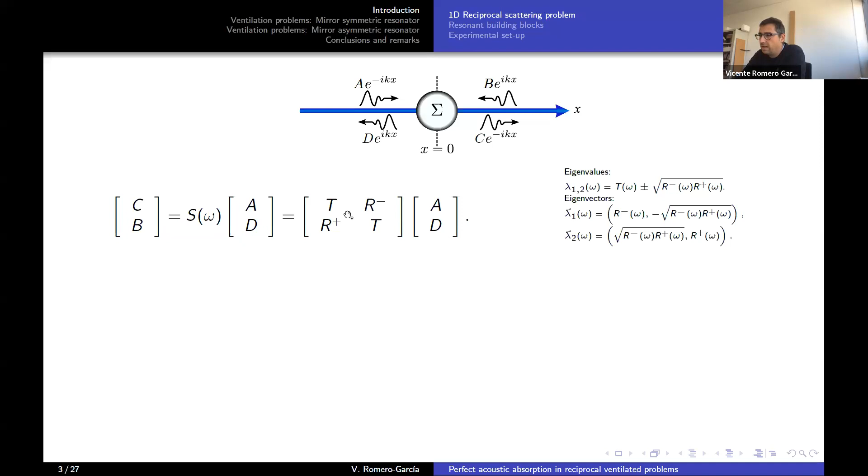So here you can study the eigenvalues and eigenvectors of the system. You can notice that if an eigenvalue of the scattering matrix is 0, this corresponds to the case in which the incident waves can be completely absorbed, because C and B are equal to 0. This happens at a frequency at which the transmission equals this value.

When we don't have losses, this appears for a frequency that is complex, so it's not realistic. But when we have losses, this can happen for a frequency that is real, and then we can have the situation of perfect absorption.

In a simple case in which you don't have transmission, so if you are not in a ventilated problem, the scattering matrix collapses to a scalar value, which is the reflection coefficient, and perfect absorption is just the impedance match problem of the system. What you want is that the reflection coefficient will be 0 at some particular frequency.

I will not talk about that because I'm interested in the ventilated problems. And in the ventilated problems, in fact, you have two different kinds of problems.

The first one is the asymmetric resonator. Notice that I can have the same transmission coefficient because I'm in the reciprocal problem, but I can have different reflection coefficients in the case of lossy systems, in which the reflection coefficient is different from both sides. This means that the system behaves in a way which is asymmetric or non-mirror symmetric with respect to the middle plane.

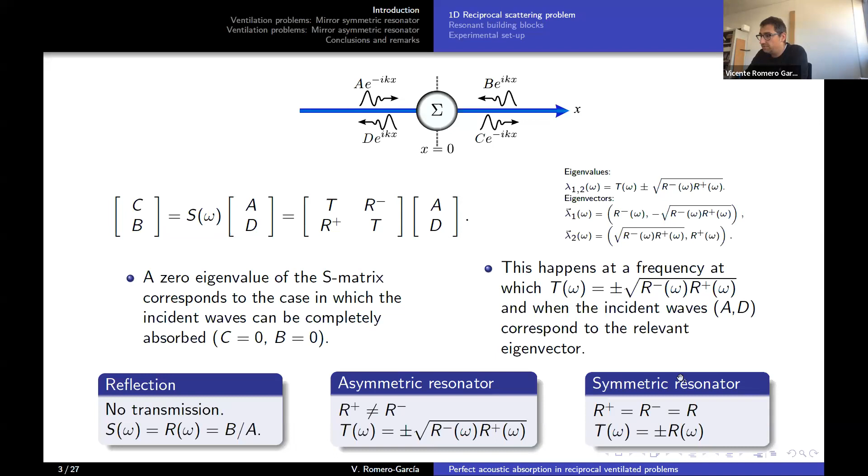Let me start by discussing this system with symmetric resonator. This is what I call a reciprocal symmetric system. So here is the system that I want to study.

This is a panel in which you have slits, and these slits you load, in that case, with Helmholtz resonators. A wave arrives from the left, and then you have the reflection and the transmission coefficient. In that system, I will consider the losses by using the Stinson model, which is effective, complex, and frequency-dependent parameters. I will also consider the correction length accounted for the Helmholtz resonator.

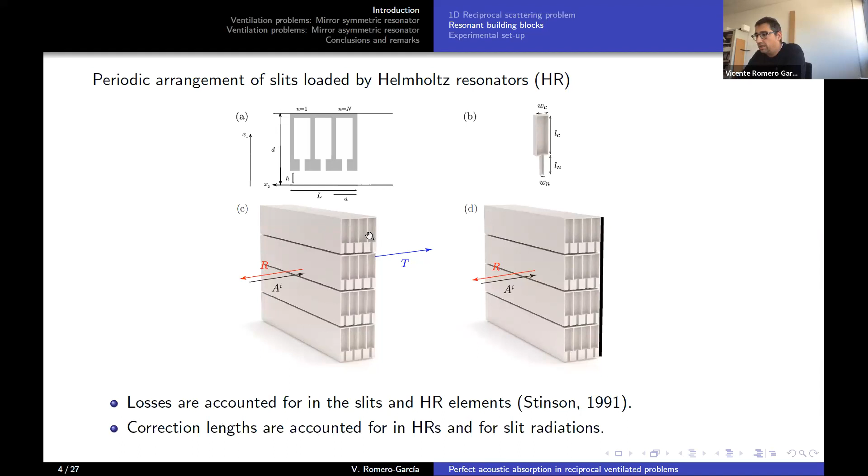So in the experiments that I will show through this presentation, I will use this setup in which I put the resonator in this position here, flush mounted or at the end in the structure. Basically, I will put this and I will have slits here. And I have a robot that can measure the acoustic field in this part of the system in order to obtain the A and B amplitudes.

And in the other part of the tube, I have 4 positions which allow me to obtain C and D. I will use an anechoic termination.

Here you have the characterization of the anechoic termination, and you can see that in fact it's really working in the range of frequencies in which I want to study the perfect absorption.

I will use also what we call the Argand diagram to visualize the perfect absorption from the experimental data. This is just the representation of the eigenvalues of the scattering matrix in terms of real and imaginary part of them in terms of frequency.

If one of the points is close or on the origin of coordinates, this configuration corresponds to the perfect absorption configuration, just to give you this information.

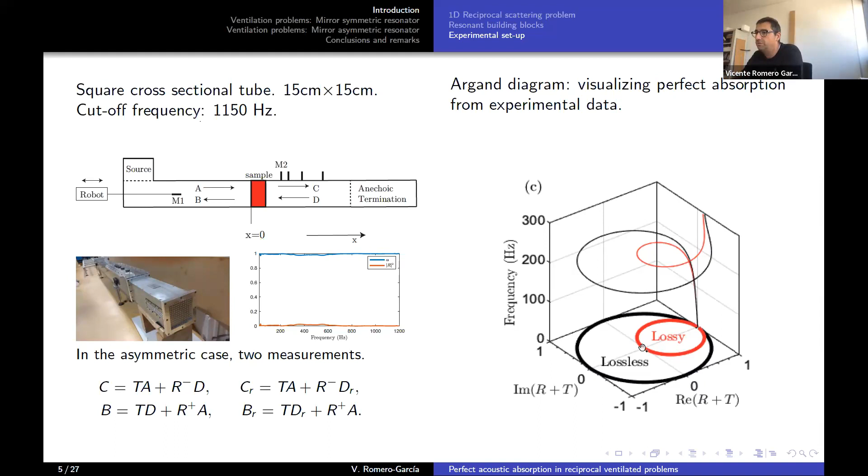So let me start by the mirror symmetric resonator. This case is represented by this plot here. You can see here a full transmission problem. And here you have a wave that is radiating from the left to the right to the system.

The system is here represented in black. Then you have the reflection coefficient and the transmission coefficient. And in that case, as the system is completely symmetric, the reflection coefficient is the same from both sides.

And the transmission coefficient in the diagonal is the same because we are in reciprocal systems. Okay, so let me just discuss two different configurations in which I introduced a Neumann boundary condition at the middle plane of my system.

If I introduce this Neumann boundary condition, this is like a mirror for acoustic waves. Basically what you have from this mirror is the image from the other side of the reflection coefficient. When we put a Neumann boundary condition in the middle plane of the structure, it's just the addition of the reflection and transmission coefficient of my original problem.

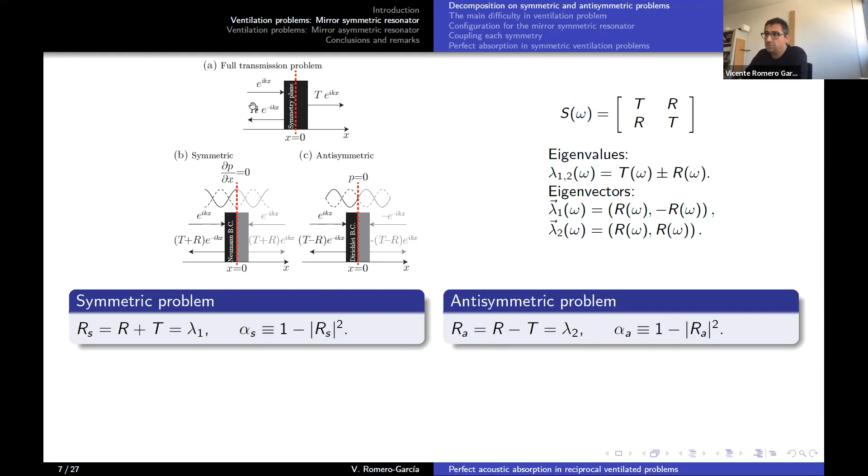So look, if I want to study the reflection and transmission coefficient of my original problem, I can decompose this problem in terms of a symmetric problem and an antisymmetric problem, in such a way that the reflection coefficient is the reflection of the symmetric plus the reflection of the antisymmetric, divided by 2. The transmission is given similarly, and the absorption is just given by the absorption of the symmetric plus the absorption of the antisymmetric, divided by 2.

So if we want to obtain a perfect absorption, alpha equal to 1, at a given frequency in this kind of problem with symmetry, then we need to simultaneously obtain that the reflection of the symmetric problem should be 0, and the reflection of the antisymmetric problem should be 0. Then, if we have that, the absorption of my original problem is equal to 1.

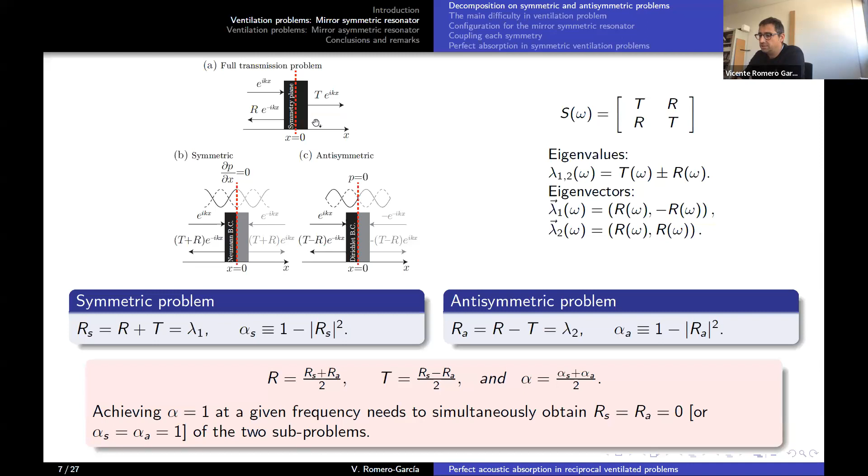So let me discuss this situation in a very simple case. This is the case in which you have a slit here of length L. We have the amplitude, the pressure, the incident pressure here, the reflection and transmission. This is a very simple problem, it's just a Fabry-Perot resonator, basically.

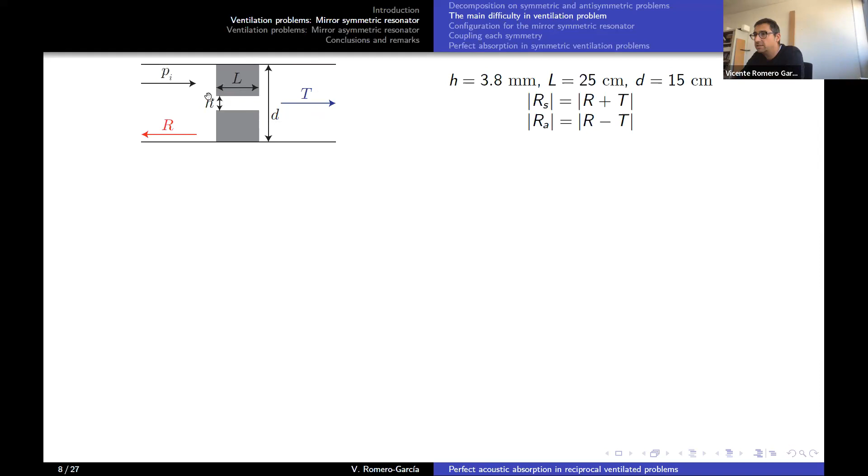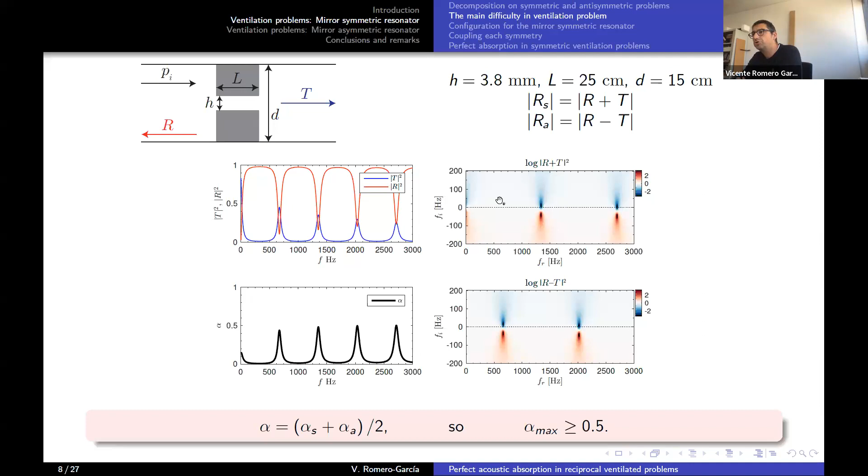We can have more if we have another kind of resonator that couples the antisymmetric and symmetric problem, in the example that I gave you. So to solve this problem, what we need is to introduce other kinds of resonators that present symmetric and antisymmetric resonances at the same frequency. This is what we call degenerate resonators, because they have two resonances at the same frequency.

In that case, what we use is basically this block here, in which we have two slits. In one of the slits, we load a Helmholtz resonator, and in the other one, we load two Helmholtz resonators. In the case where we load a single Helmholtz resonator, we will have a symmetric mode. And in the case where we load two resonators, we will have a symmetric mode and an antisymmetric mode.

So in that problem, we will consider the losses by the Stinson model, as I told you previously. The correction length of the Helmholtz resonators is also taken into account. But in that case, we consider several modes, the multimodal propagation in the waveguide, in order to account for the possible coupling between the slits.

Which we will see is quite critical in that system. So in order to obtain perfect absorption in that kind of system, what we need is first to work with the antisymmetric resonator. So let's consider the same configuration, but in which we impose a Dirichlet condition at the middle of the system. In that case, what we have is a change of phase in the image of the original reflection problem.

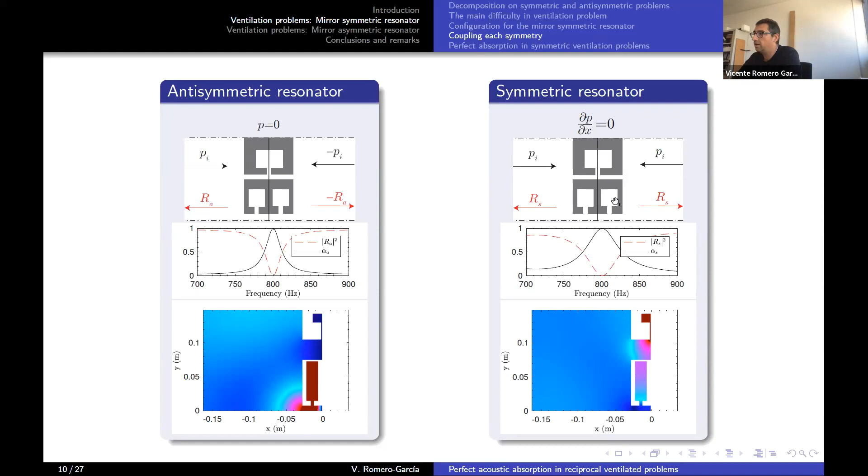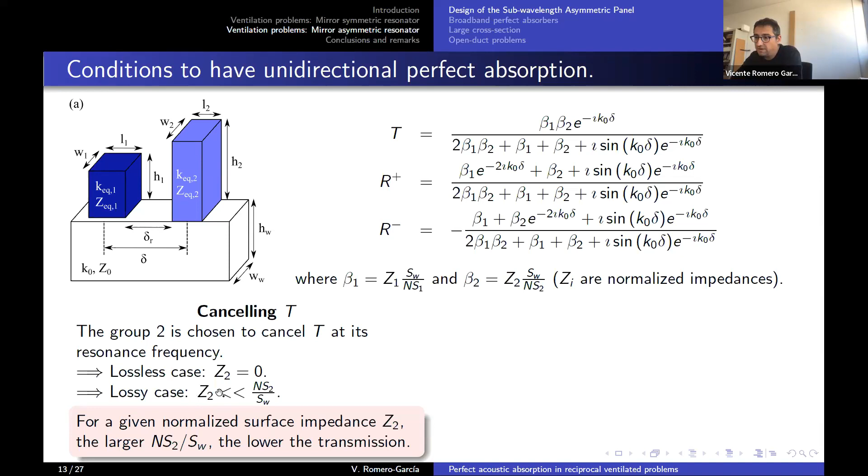Even in that case, the impedance could be much bigger. So once we cancel T by using this resonator, we need to cancel one of the two, R plus or R minus.

So this is the price that we have to pay in order to obtain perfect absorption with asymmetric structures: we only can obtain perfect absorption from one side. This is what I called unidirectional perfect absorption.

So to cancel R plus, if we impose Z2 equal to 0 or close to 0 with a very small value, the condition that we obtain is an equation that we can develop in Taylor.

And if you develop that in Taylor, we obtain a minimal absorbent length that depends on the cross-section of the waveguide, basically. So the cross-section of the waveguide is quite important.

And in particular, if you are close to the Fabry-Perot resonance of the system, at these frequencies you cannot obtain perfect absorption because the system is purely reflective. So here you have to play with the cross-section.

So let me discuss that kind of thing. First of all, let me start with a small cross-section, which is the system here.

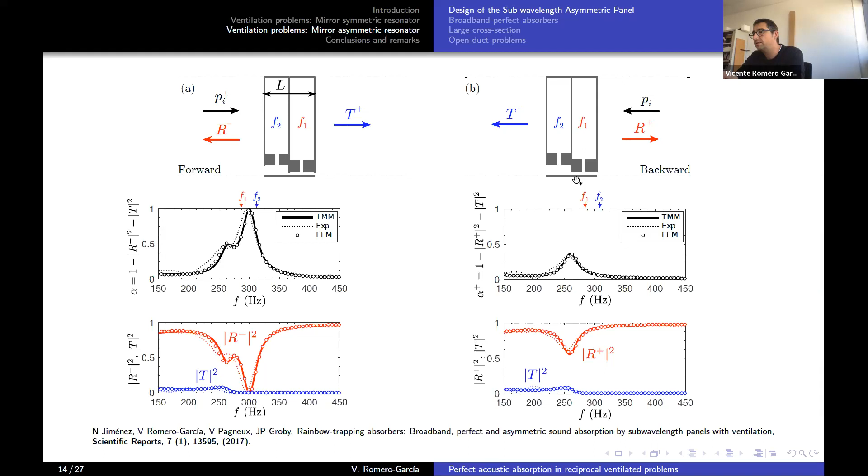So now that we understand how to design that kind of structure, we can repeat this process in cascade. Now, by using two resonators we have one peak, and we can add a third resonator and try to obtain two peaks of perfect or quasi-perfect absorption. You can see the system here, and we can do this for n resonators, giving us n peaks of quasi-perfect absorption.

Once we have this, we can push the system to obtain a flat absorption. This flat absorption is not perfect, it's not one at mostly any point, but it's close, very close to one. The price we pay is that we don't have perfect absorption, but it's very flat and very close to one. So we can design that kind of structure, and it's just a play between the geometry of the resonator and the cross-section of the waveguides.

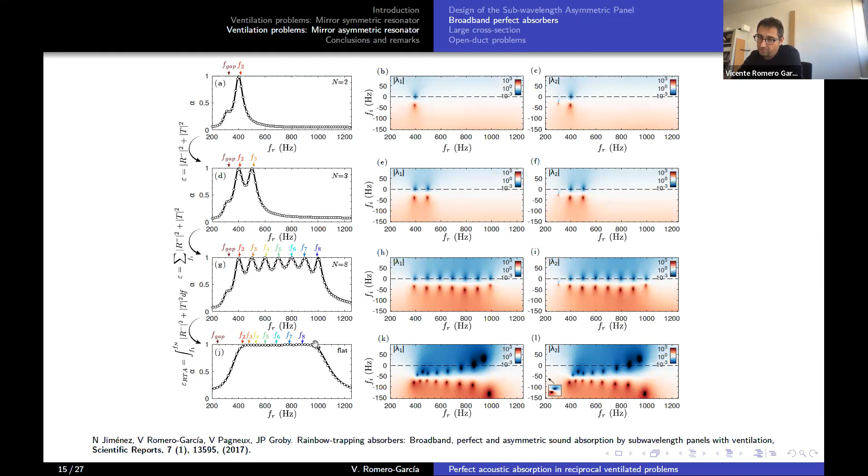So we 3D printed that kind of structure, and here you can see the experimental results in the dotted line. We can see that we have mostly perfect, quasi-perfect absorption from 350 Hertz till 1000 Hertz. The length of the system is 11 centimeters, 11.3 centimeters, which is quite sub-wavelength - the ratio lambda over L is 10. So this is a very nice result that we have obtained.

This particular system shows that each frequency is absorbed at one particular position in the structure, due to the fact that each resonator is designed to absorb each frequency, and this is why we call them rainbow absorbers. This is published in Scientific Reports, one of the papers of Noé in 2017.

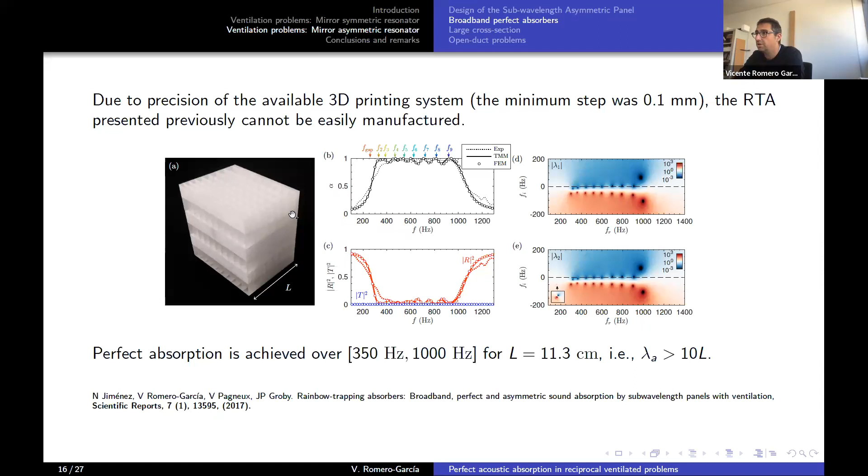But this corresponds to the case of short cross section, a very narrow cross section. So what happens if we go to a large cross section? I will not go too much into details, but I will show you several examples.

Here I consider a Helmholtz resonator that is loaded to a waveguide, and the height of the waveguide is h. So now I study the transmission loss produced by this resonator, and we optimize the resonator to reduce the transmission as much as possible in terms of the height of the waveguide.

You can see that if the waveguide is very narrow, not wide, so 1.5 centimeters, the transmission loss arrives to a high value, and the quality factor of this peak is quite low because it's wide in frequency. However, if we increase the height of the waveguide, we arrive at the same value of the transmission loss, but the price we pay is that the quality factor is increased a lot. So the quality factor of the resonator increases as we increase the height of the waveguide. This could be a problem for generating broadband absorption with high or wide waveguides.

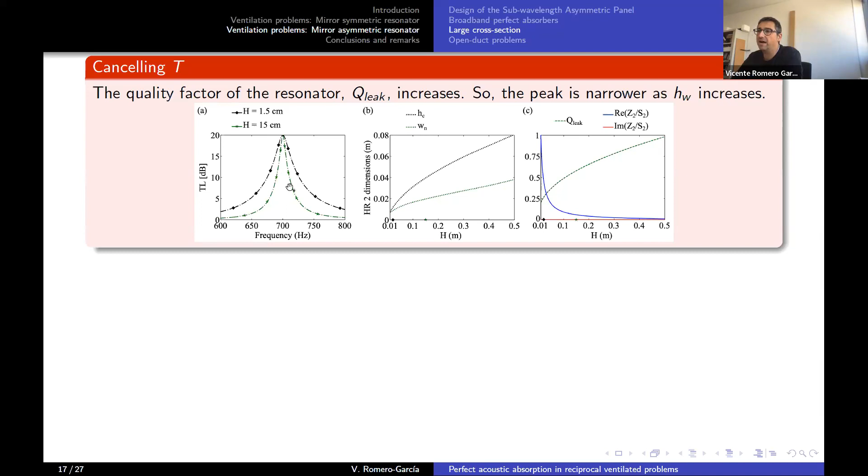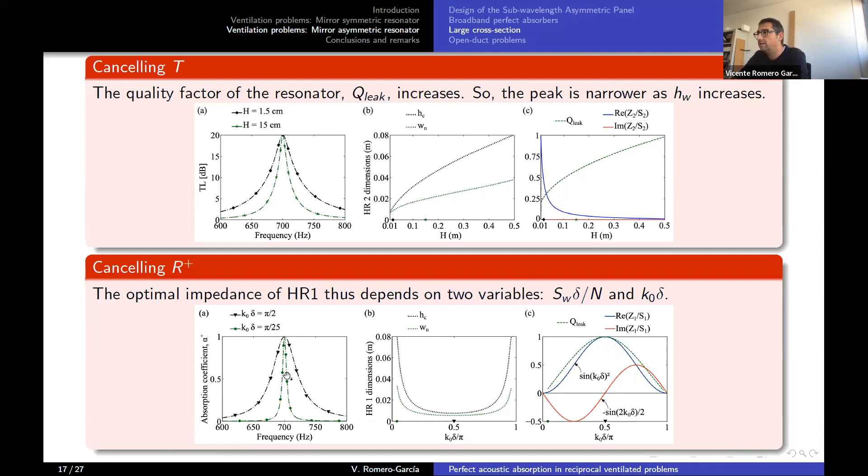So taking that into account, I would like also to discuss the effect of the evanescent coupling between the two resonators, because we have two resonators that are plugged into the system and the waveguide, and they are close to one another.

So if we study here the transmission loss by using the transfer matrix, you can see here the peak of transmission loss in terms of the height of the waveguide, and here you have the peak of the transmission loss in terms of the distance between the resonators.

You can see that as we increase the height of the waveguide, if we calculate the problem using multimodal techniques with evanescent coupling, at high values of the height of the waveguide, so for wide waveguides, this behavior is completely destroyed, and it's very difficult to obtain a low transmission loss. The same happens when we go to the situation in which the resonators are very close one to the other.

So when we want to obtain perfect absorption with wide waveguides and closest resonators, so narrow, sub-wavelength systems, we are in a bad situation in order to obtain perfect absorption. So you have to push the model a little bit more in order to obtain this perfect absorption, so you have to look for the good configuration.

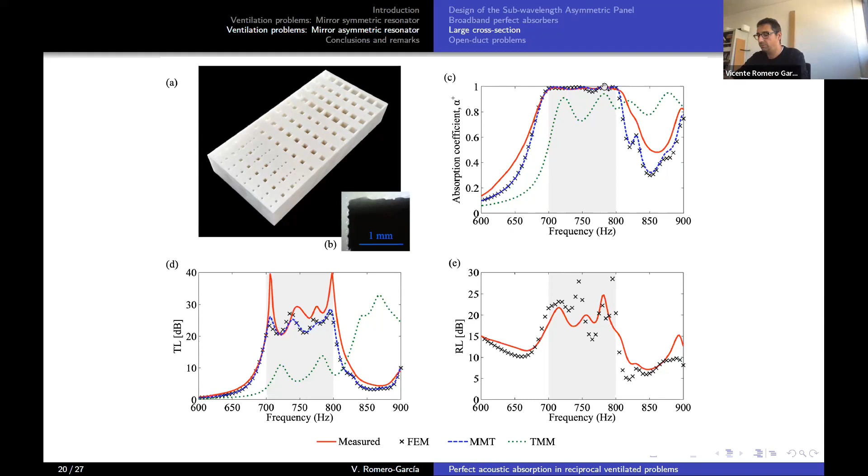Okay, so now this is the last part of my talk. I would like to give you the last results that we have obtained with the work of Meng Yang, who is a postdoc now in LAUM, doing a very good job in that kind of structures.

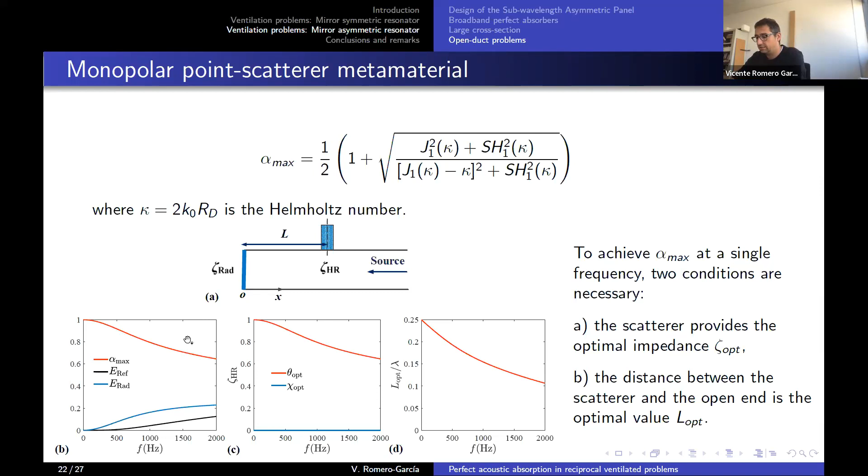If we want to pass the bound of the absorption, what we need to do is use two Helmholtz resonators. By using these two Helmholtz resonators, we can manage to design the impedance of each one and the length with respect to the end of the system and between both resonators, in order to surpass this structure.

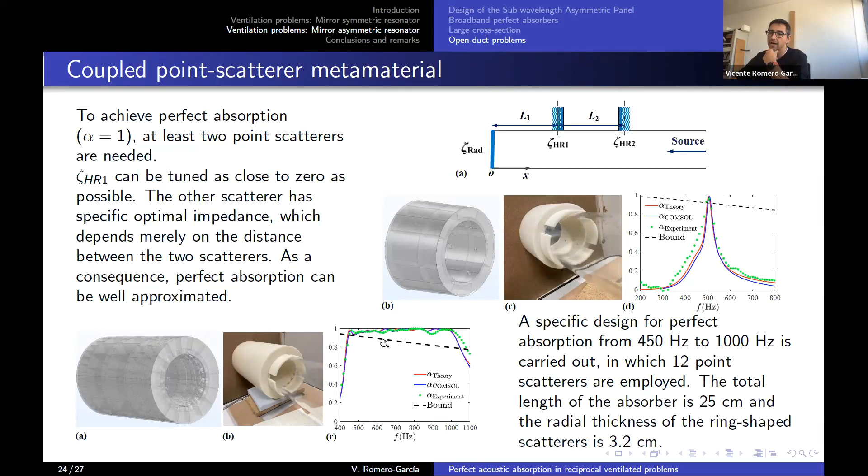So we have designed this structure with two rings in which we have quasi-perfect absorption at one particular frequency, surpassing the bound imposed by the theory. And basically we can repeat this structure in order to have a broadband quasi-perfect absorption surpassing the bound imposed by the theory. So these are the results that I wanted to show you today.

To conclude, I would like to give you some remarks. By using mirror symmetric absorbers, we can obtain perfect absorption from the two sides. To do that, we need degenerate resonators, and we need to use Bloch waves in order to obtain the coupling between the structures.

If we want to obtain perfect absorption in a broadband structure, the most simple situation is to use the tuned resonator. The price that we have to pay is that we will obtain only unidirectional absorption from one side.

And we can design structures to obtain rainbow absorbers with narrow waveguides, which is the simplest situation. If we go to large cross-section, we still can obtain perfect absorption, but the price we have to pay is that the range of frequencies will be narrower.

And finally, for the open-ended duct, we can also obtain alpha equal to 1. But to do that, we need at least 2-point scatterers.

So here in bold characters, you have the papers in which you have all the details about the things that I talked about today. And I would like to thank you for the attention.

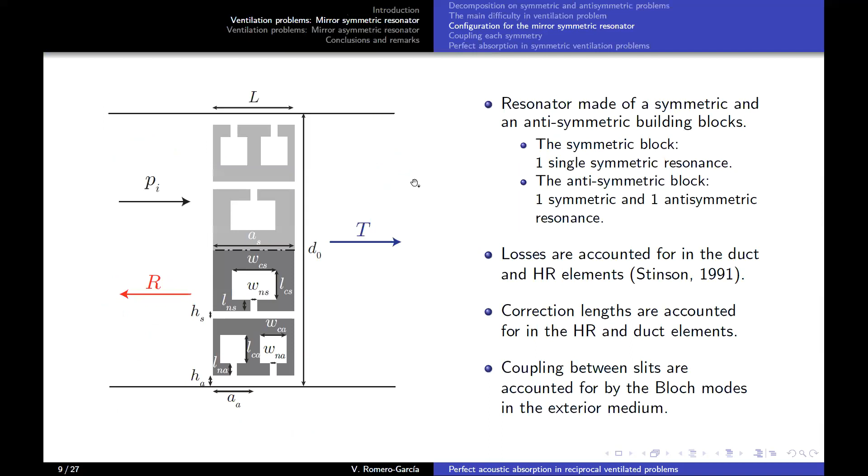It's more, in my opinion, the leakage is more important in the other configurations in which you can have some leakage from the sides of the structure. For example, here you can see that there are some small slits here. And in fact, in order to avoid the leakage through this, we use grease. We put some Vaseline.

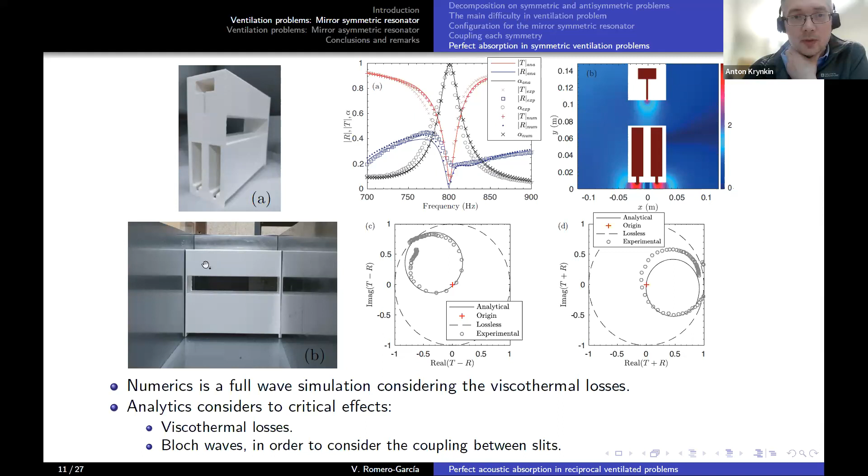Okay, yeah, thank you very much. Did we answer a question from Rod? Are there any results of the transmission loss for the ring absorbers?

In the ring absorbers, the absorption is defined as 1 minus the energy reflected minus the energy radiated, normalized by the incident wave. So it's not a general absorption coefficient because here we have the radiation, right? So if alpha equals 1, that means these two energies should be very close to 0. I didn't plot the transmission loss in any configuration here, but at these particular frequencies, the reflected energy and radiated energy are both very, very low, because otherwise we cannot have a perfect absorption here.

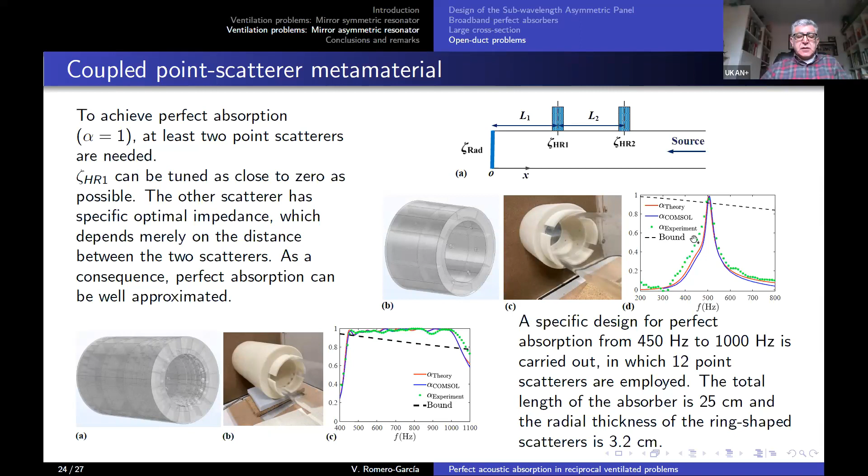But the question is, I assume these are all numerical simulations. You haven't done any measurements for these? Yes, yes, the green dots here are experiments. All the green dots in these configurations are experiments here.

Thank you, so that answers Rod's question. So the last question is from Arthur. Did you experiment with increasing the coupling of the resonators? This might be used to address the issue of a small resonator relative to the cross-section of the duct.

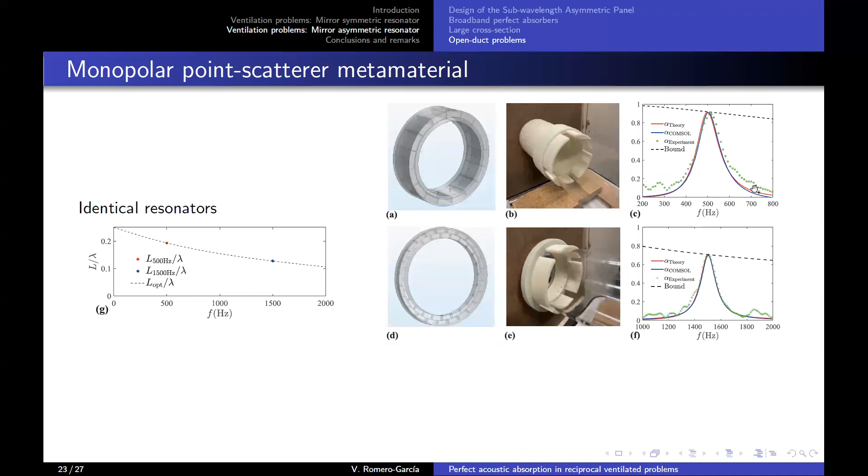Yes, this is a very good remark. This is what I was saying previously in this situation. If you model the system by using the coupling between resonators of the multimodal structure, you can see that when the resonators are very close one to the other, this means that the transmission loss is not so high, so the transmission is quite big. So it's very difficult to obtain perfect absorption.

And if you want to obtain it, what you need is to do it for a very narrow system. So when we optimize the structures, basically what we are doing is playing with the coupling of the resonators to obtain the perfect absorption. This is intrinsically introduced in the modeling of the system.

Arthur has asked another question. He said, are there any differences between a square cross-section channel and the circular cross-section? Shall I ask Arthur to ask verbally?

With respect to the cross-section, is there a difference between a square cross-section and a circular cross-section physics-wise? The physics is the same, you can do the same in both systems. As you can see here, for the last part we used a cylindrical tube, but we could also use a square one. The physics is the same. You only have to take care of the modal expansion in each kind of tube, the coupling with the resonators, and how you do the multimodal matching. But basically the physics is the same, there's not too much difference.

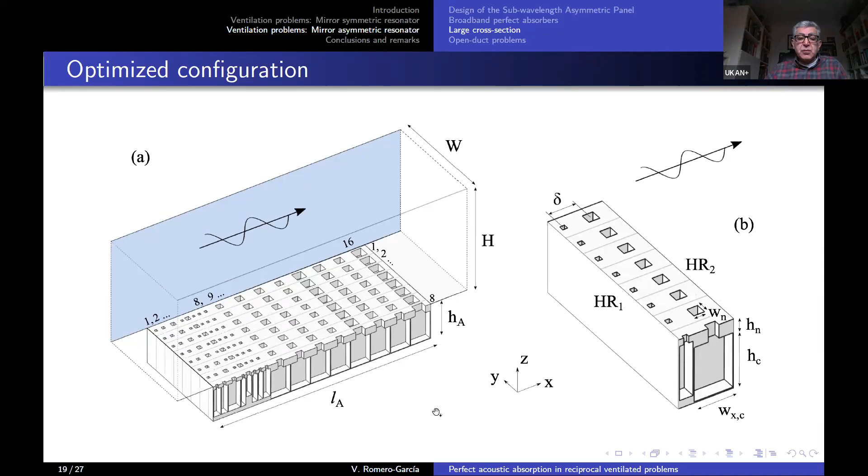One last question. Olga is asking, how important is the baffle for the last problem? What if there is no baffle? That's a very good question.

The baffle is important because we need to know the expression of the radiation impedance in order to treat the problem analytically and obtain some expression of that. If it's not baffled, you can use the same procedure by using the radiation impedance of the unbaffled problem, but you have to change the configuration, that's the only difference. There's no restriction on that. The only thing you need is the expression of the radiation impedance, and if it's unbaffled, you have it also. So you can change this impedance and redesign the structure using the new expression and obtain the system. Thank you.

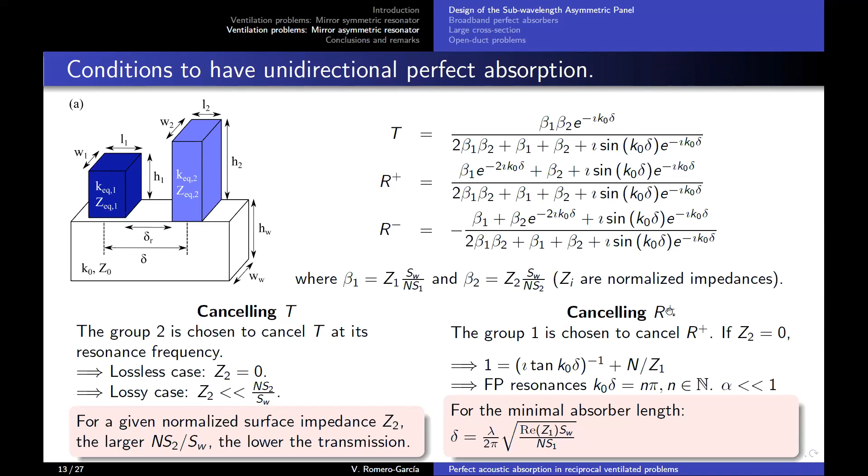Yes, so there is a role in the order of the resonators. For example, here you can see some small resonators and some big resonators. These big resonators are imposed by the physics of the problem to be big, in order to introduce a low real part in the impedance of the second resonator to kill the transmission. This is what I was saying before - we need a small value of Z2 to cancel T, and then we have to introduce some losses to cancel the reflection. So if the transmission wants to be canceled in a big cross section, we need big resonators to have a small amount of impedance losses to cancel the transmission. So all of that is due to canceling the transmission, and to introduce the amount of losses to absorb, we need a small resonator to increase the losses. So one part corresponds to canceling the reflection, and the other part corresponds to the resonators that kill the transmission. Both of them are crucial to obtain the perfect absorption.

How important is the position inside this configuration? We don't have a clear answer. What we know is that they should work in pairs, because two of them work, but when all the resonators are put together, since there is evanescent coupling between the resonators, it's difficult to see the relevance of the position of each resonator inside each of the two parts. But what is clear is that we need some part that cancels the transmission and the other part that cancels the reflection.